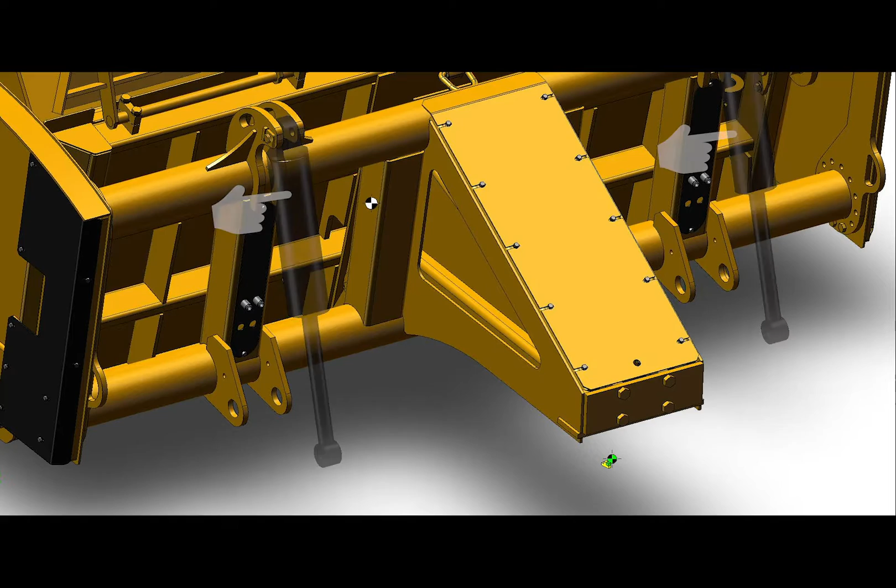The 1410 rear frame plumbing and installation lower tube assembly. The hydraulic lines that run through the lower tube control the lift circuit and the feed lines. We will dissolve away certain frame members to allow you to see the routing of this plumbing.

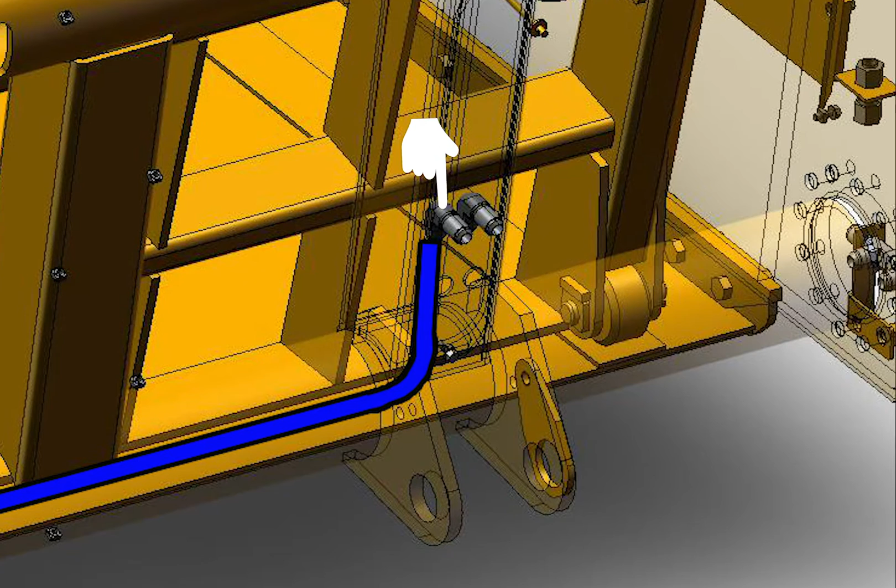The first hose we'll install is on the left hand side, identified by number 6 bulkhead lift. This is mounted to the T on the lower tube of the left side. The hose continues through the tube and up to the left-hand 90-degree fitting on the opposite side. Tighten the fitting before advancing to the next hose.

The last hose on the left side is number 5, bulkhead to bulkhead lift. This hose connects to the 90-degree fitting on the T end of the left-hand rear corner and goes to the left-hand side fitting of the lift.

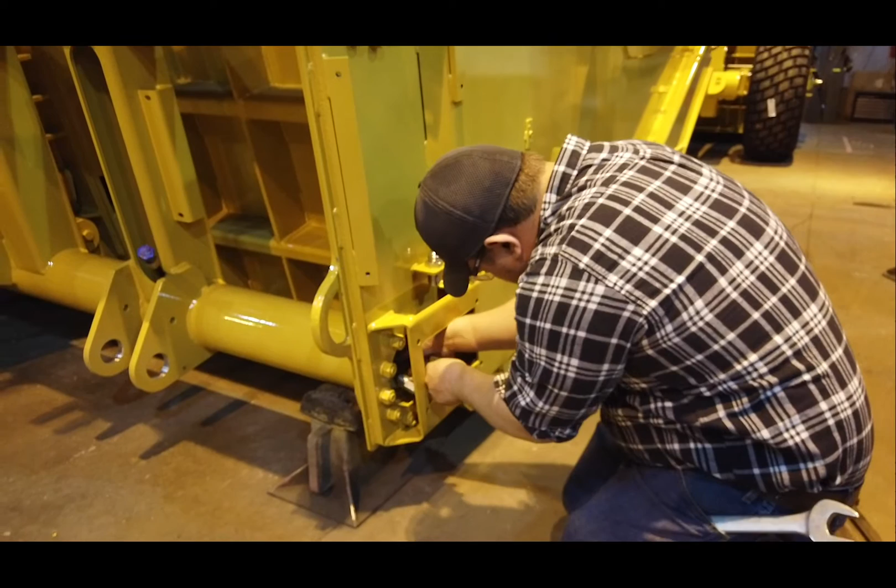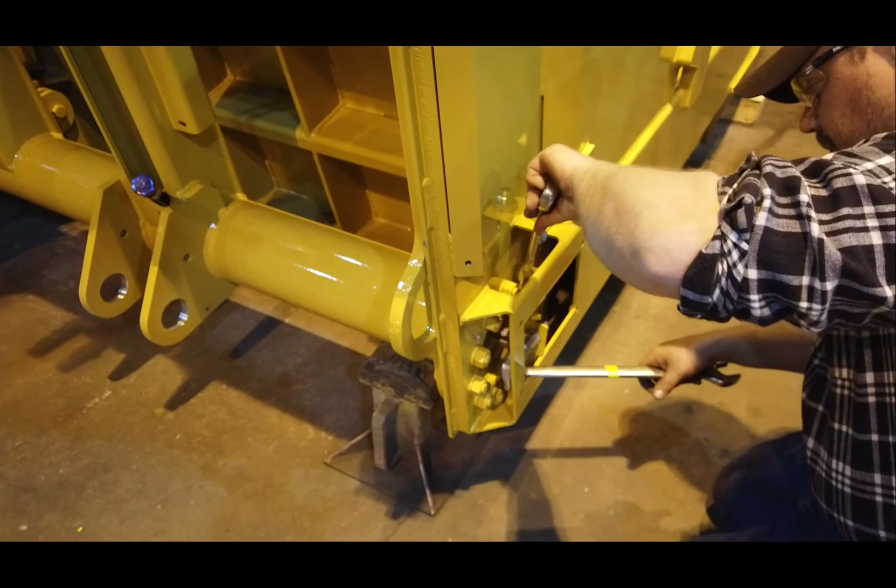The plumbing on the right side is nearly identical to the left. The first hose installed is number 6, bulkhead to bulkhead lift, which is installed to the T on the right hand side and passes through the lower tube assembly to the right 90-degree port on the right standard. Tighten the number 6 hose before moving on.

The last hose going through the tube is number 5, bulkhead to bulkhead lift. This connects to the 90-degree fitting on the right hand side and to the right fitting on the right wheel standard. Be sure to thoroughly tighten the hoses on both ends, since these hoses run within the main framework and it'll be hard to see if there's any leaks starting.

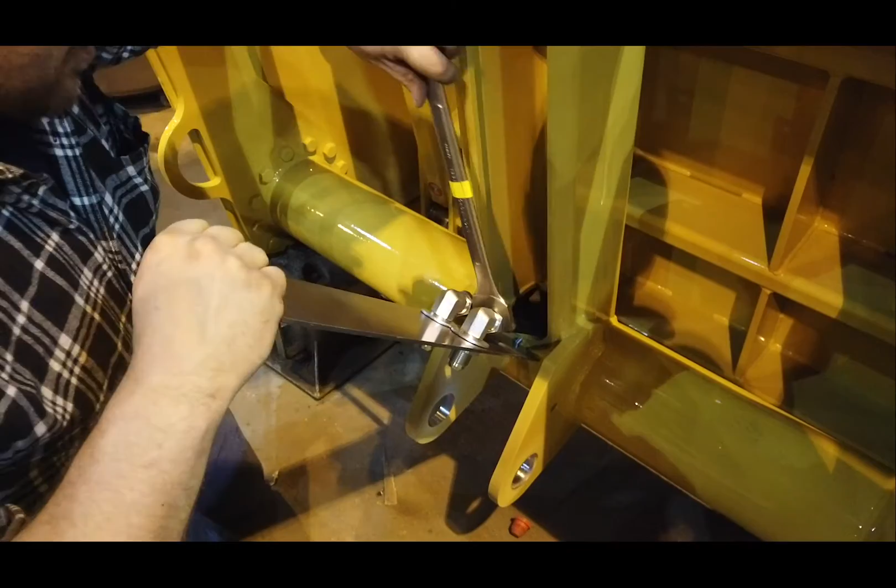Install the vertical bulkhead on the wheel standards. The next hoses we'll install are the feed hoses from the front section to the rear corners of the scraper. All 4 of these feed hoses are exactly alike and are labeled front section bulkhead to bowl bulkhead.

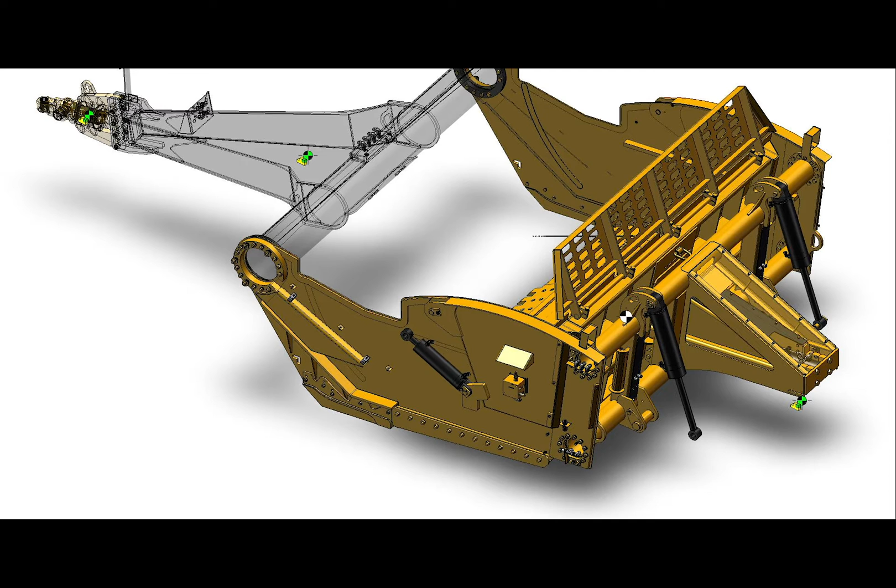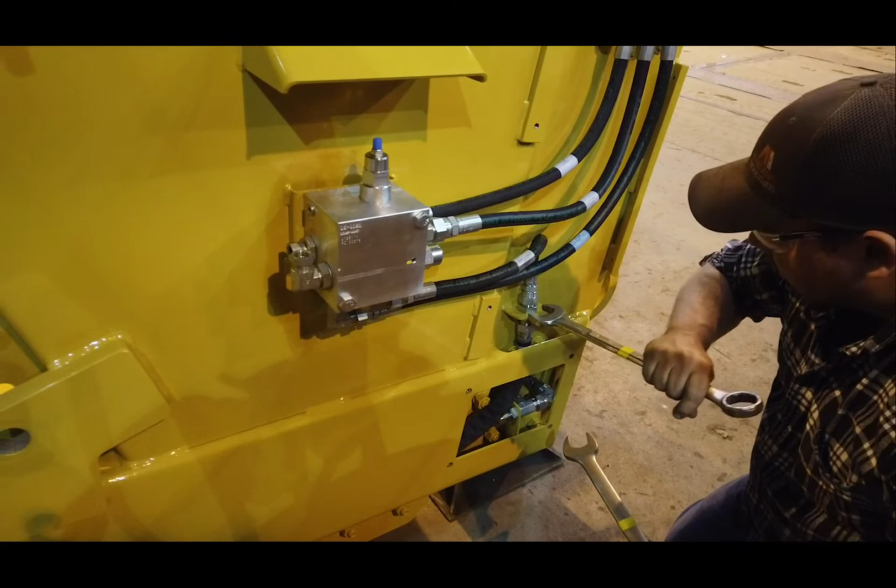Again, we dissolve some of the frame members to see the proper routing. The first feed hose we'll install is connected to the vertical bulkhead on the left rear corner of the scraper. Tighten the hose before moving to the front section fitting. Route the hose through the frame, up along the side and through the front section pipe to the front bulkhead.

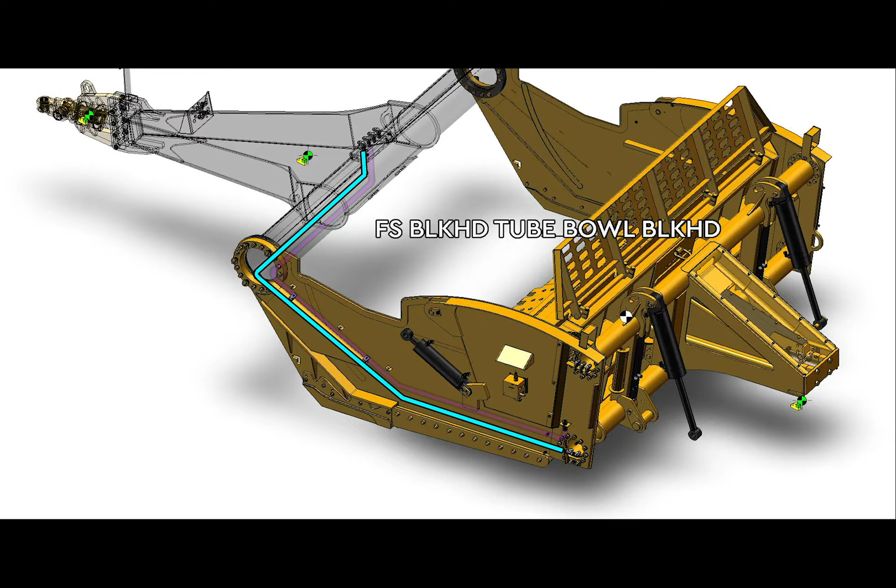On the front section pipe, you'll notice there are 4 90-degree fittings at the bulkhead. This particular feed hose goes to the second 90-degree fitting on the bulkhead from the left. The last feed hose on the left side goes to the T end at the left rear corner and to the first 90-degree fitting on the front section bulkhead.

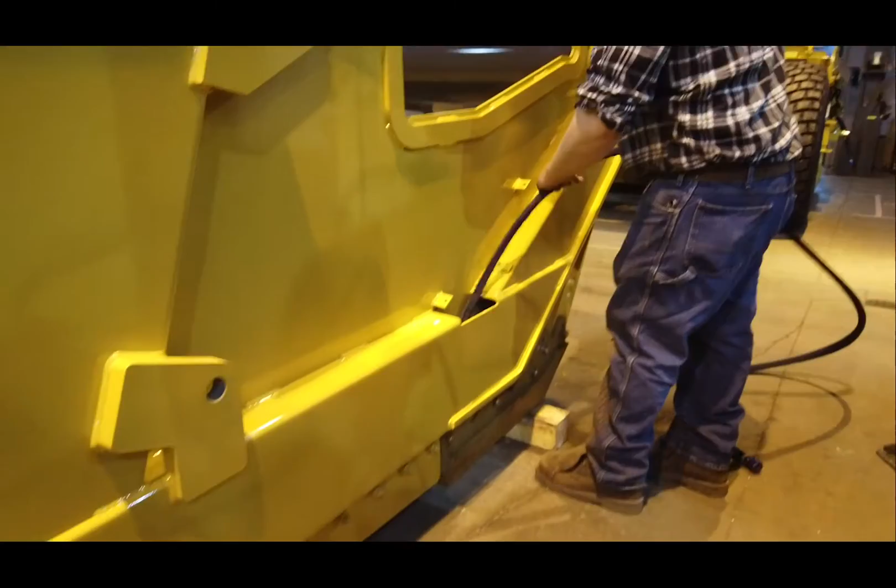Once you tighten the hoses on the left side, let's begin on the right. Thread the feed hose on the right side through the main frame and connect it to the vertical bulkhead fitting. Tighten the feed hose to the vertical bulkhead before going to the front section.

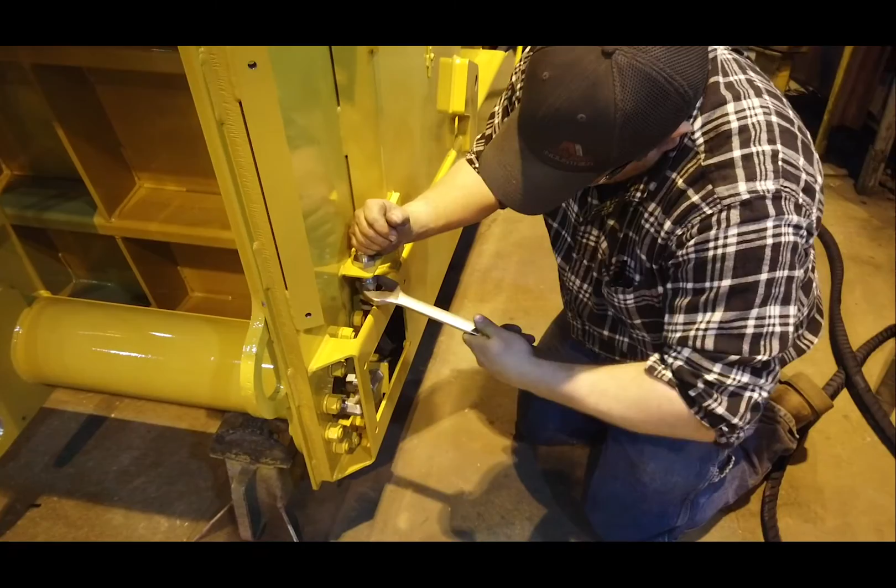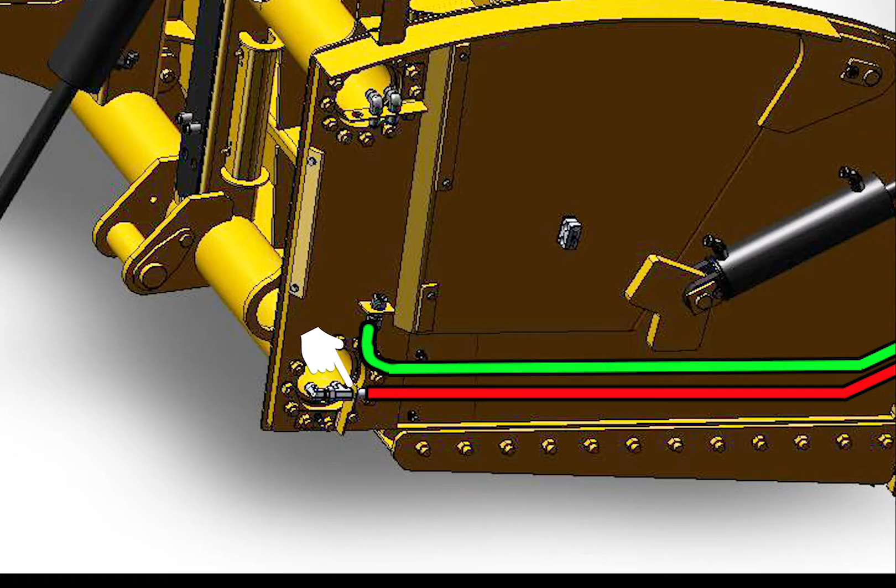This feed hose continues to run through the frame, up the side frame, and through the front section pipe to the third fitting on the left on the front section bulkhead. The final feed hose connects to the T at the right-hand rear corner and is threaded through the pipe and goes to the 4th bulkhead fitting on the front section.

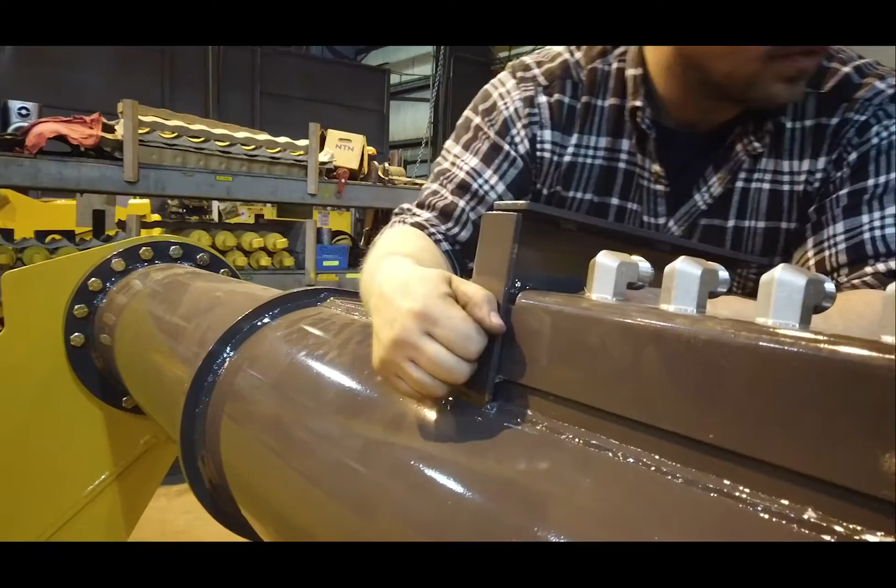Add the hydraulic hose clamps on the side frame. Secure the front section bulkhead to the brackets on the front pole. At the front of the pole near the hitch, install the 45-degree fittings for the forward bulkhead.

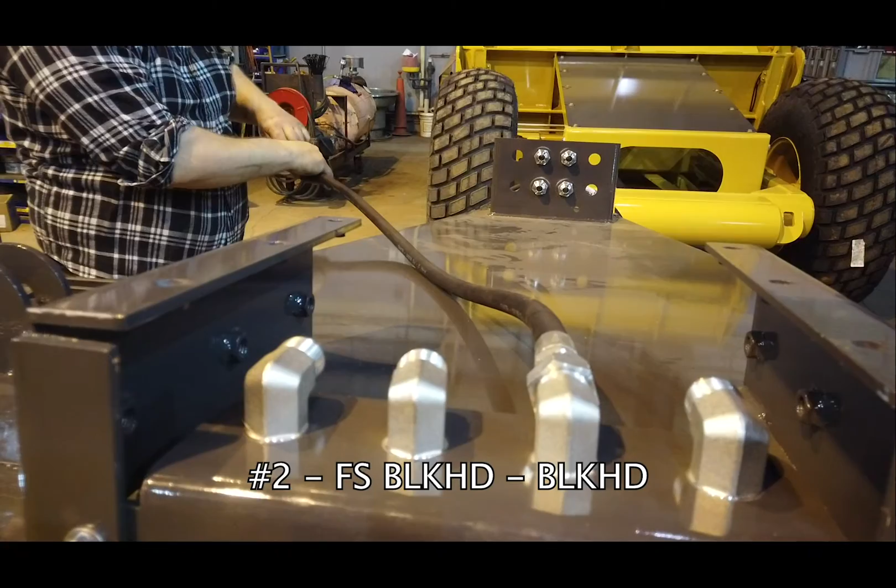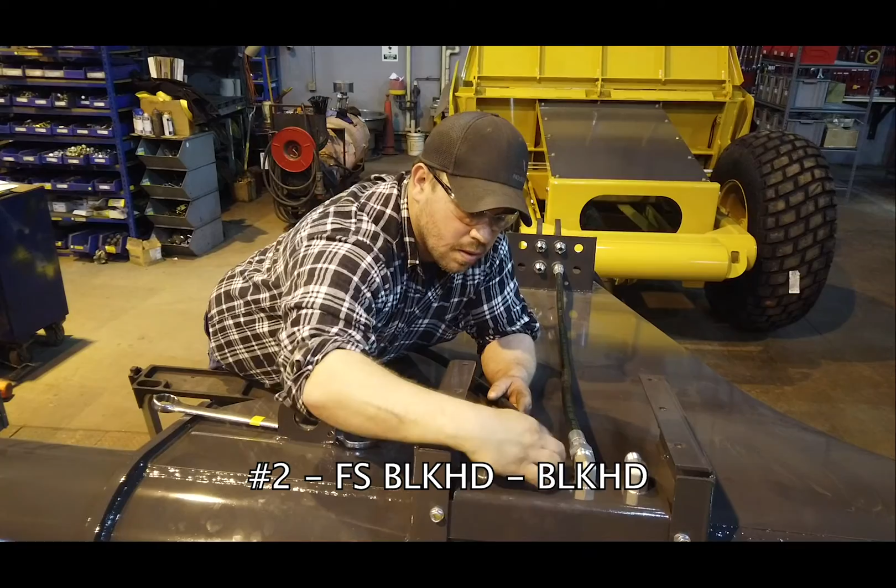On the 3rd port of the front section bulkhead, use hose number 2, front section bulkhead to bulkhead, and run it to the lower right corner of the front bulkhead. On the second 90-degree fitting on the front section bulkhead, use the same hose number 2, front section bulkhead to bulkhead, and hook it to the lower left corner of the front bulkhead. Tighten both these hoses before moving on to the next set.